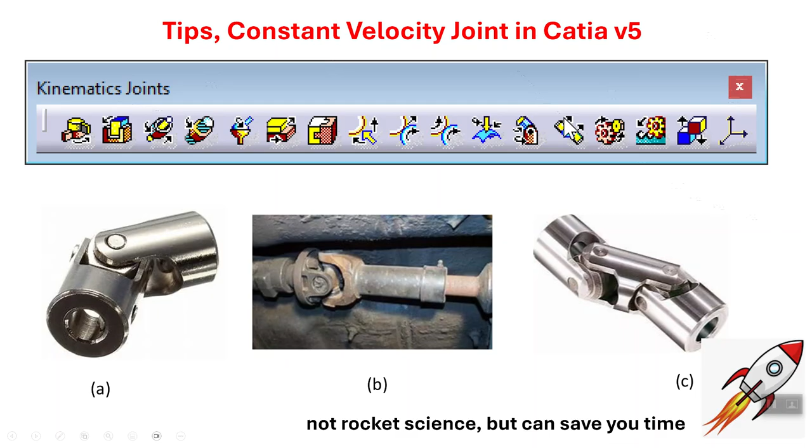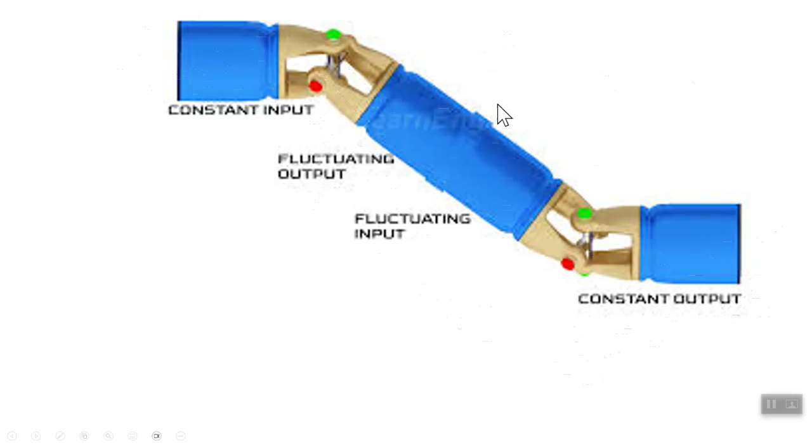In Catia, the joints are described here, and notice that there is one that kind of looks like this, and this is the constant velocity joint that we're going to be discussing. Now, here is another drawing where there is an input shaft, there's an output shaft, and notice that they're not coaxial, they don't have the same axis. But in order to transfer constant input velocity to constant output velocity, one uses this piece in the middle, which actually fluctuates. The velocity of this middle piece is not constant. Again, a setup like that is called constant velocity joint or double universal joint or double cardan joint.

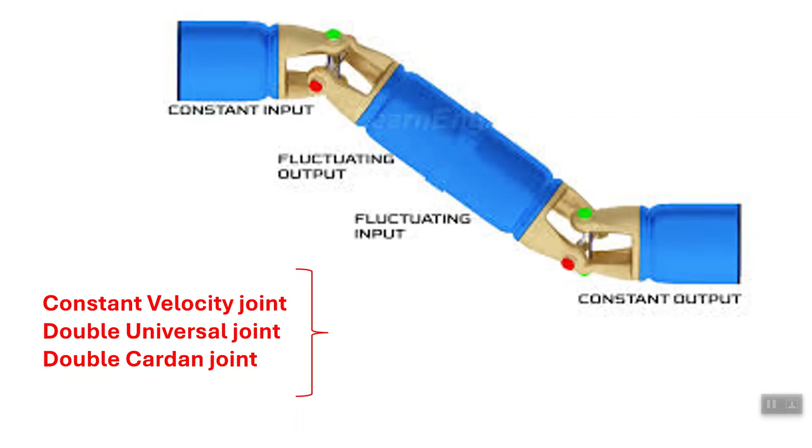Now, also keep in mind that in modern cars, constant velocity joints are used, but the setup is quite a bit more complicated than what you see here. This is the most elementary description of the CV joint. Okay. Now, what you see here is the same thing drawn in Catia. So basically, these three will make the constant velocity joint, and of course, you need two revolutes at the end where these are attached to. I have separated these so that you can see what's going on. And the purpose of these grooves here is just to make sure you can see when this thing rotates.

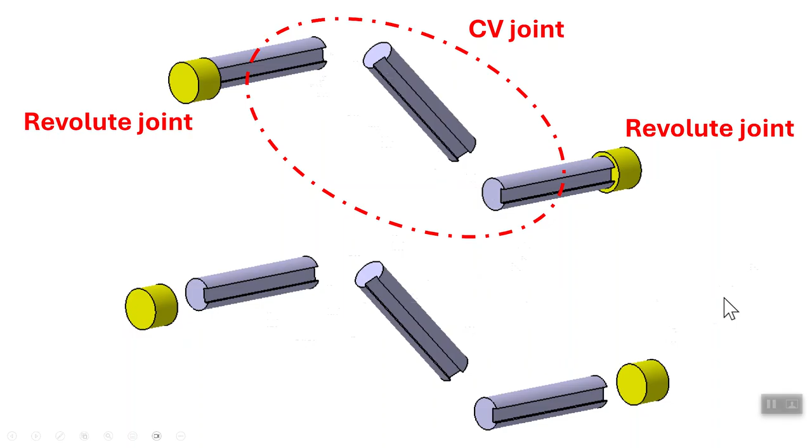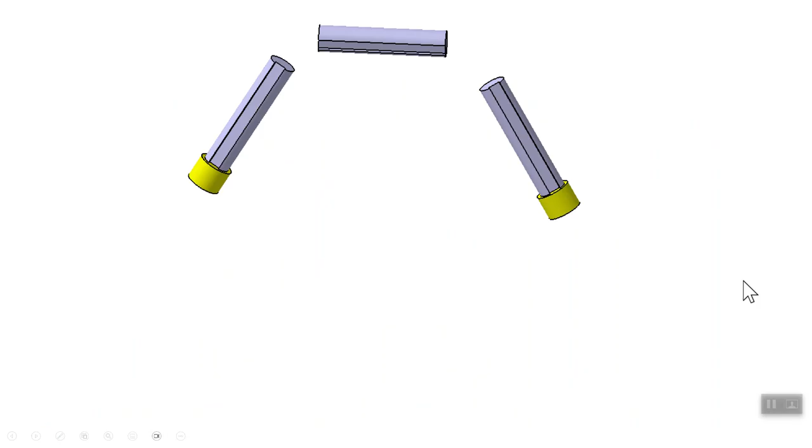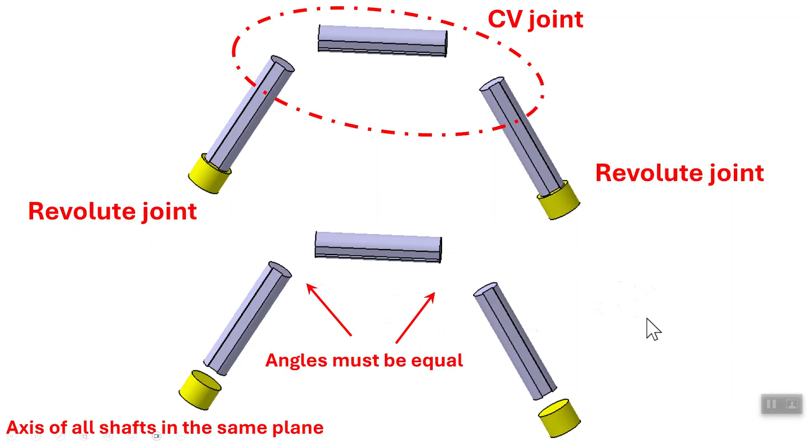But notice that under two conditions, you can create setups like this. One of them is when these two axes are parallel. And by default, that means all these three pieces, or their axes, lie in the same plane. This is one way of doing it. The alternative is this, which is called the half angle constant velocity joint, where again, these three make the CV joint, and these have to be revolute, and the axes must all be in the same plane, just like before, and these angles must be the same. Okay? So this is the other way. Now, when it comes to modeling this thing, I'm not going to do it with this setup, but we'll do it with the previous one.

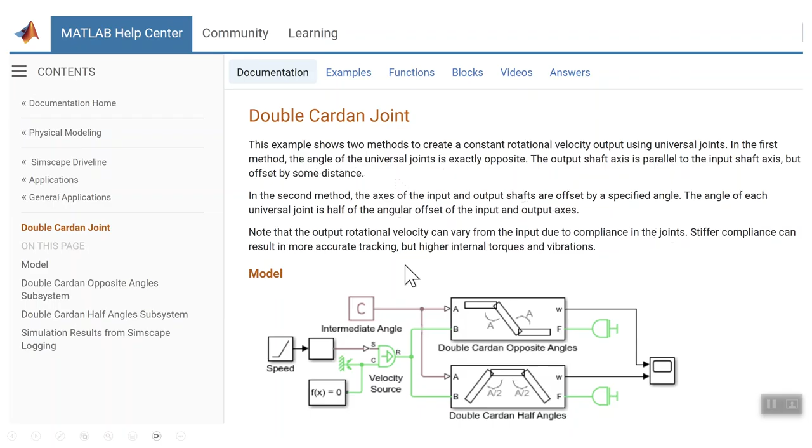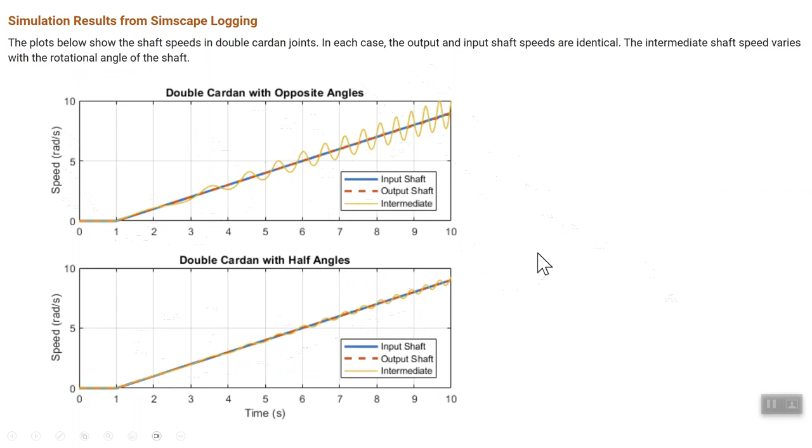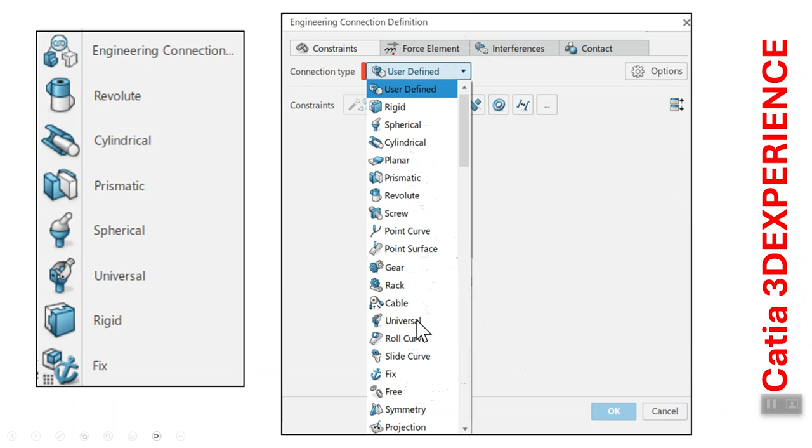There are two other good videos on the use of Catia in doing a CV joint that are given here, but once again, they don't talk about some of the delicate issues that we have to worry about. And now remember, Catia V5 is buried inside of the 3D Experience, and it's referred to as 3D Experience Catia. Now in there, if you look at the joints, the CV joint has been taken out. There's the universal joint, but the CV joint does not appear in this list.

All right, let's go ahead and do it. Dimensions don't matter in this problem, so I'm going to make one of those shafts and basically create two instances of it, and one of those yellow pieces where the revolute is going to be, and I'll make an instance of it to get the other one. So let's go ahead and insert the first new part in there, and I'm going to call this thing shaft. Properties, I'll call it shaft.

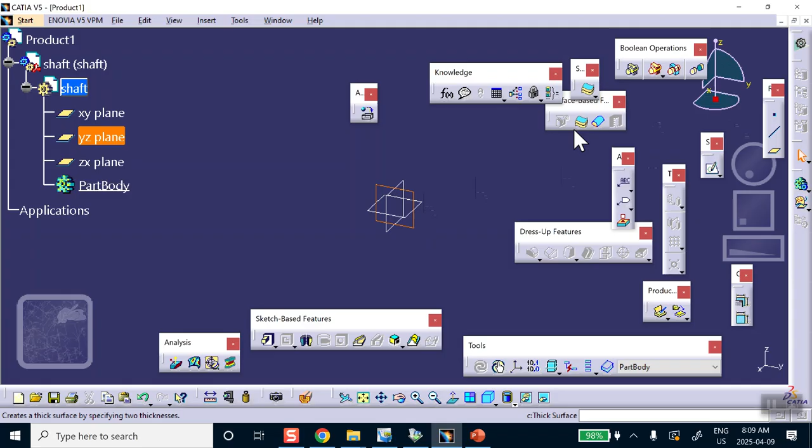Shaft. Okay, let's go make it. Dimensions don't matter. I'm going to go to this part design. On that vertical plane, I will sketch a circle like that, and I will make a slight cut out here, so that you can see actually that the thing

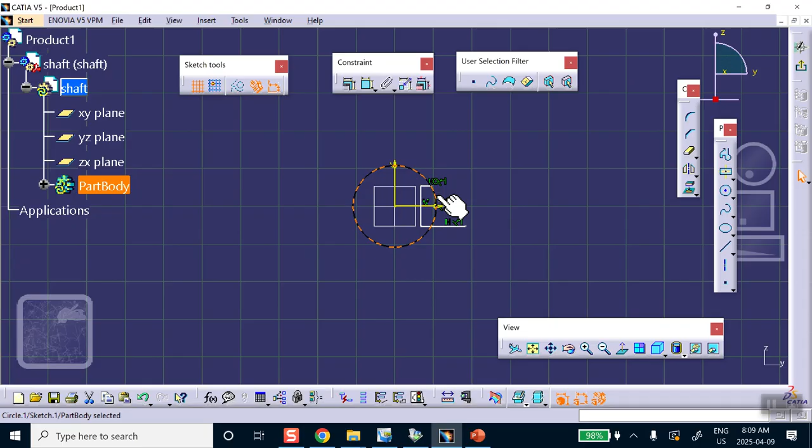is rotating. So it doesn't matter how you do it. The shape of it doesn't matter either. So yeah, I'm going to make it cut out like that. Obviously, I have to clean this up before I'm going to pad it. I'm going to get to this, quick trim that, quick trim this. Yeah, and this. And there. Exit. I'm going to pad it long enough so that I can see it.

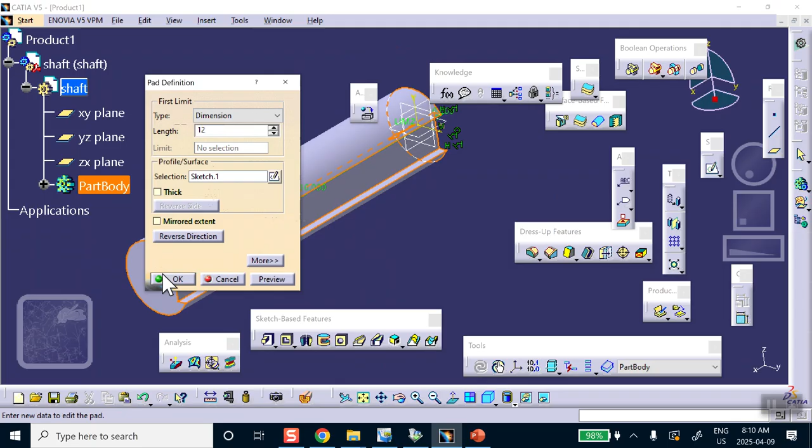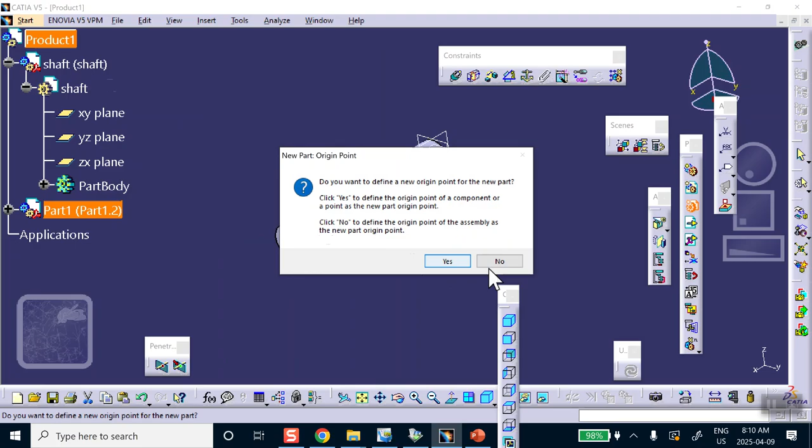Let me make this thing 10, see how it looks like. Sure. I'll make it 12. A little bit longer. These dimensions mean absolutely nothing. Okay. So this is my shaft. And then what do I make? The bearing. So insert. Let's go all the way to the top. Insert, new part. Say no, and I'm going to change the name of this thing to be bearing. That's the end pieces, where it's going to be revolute.

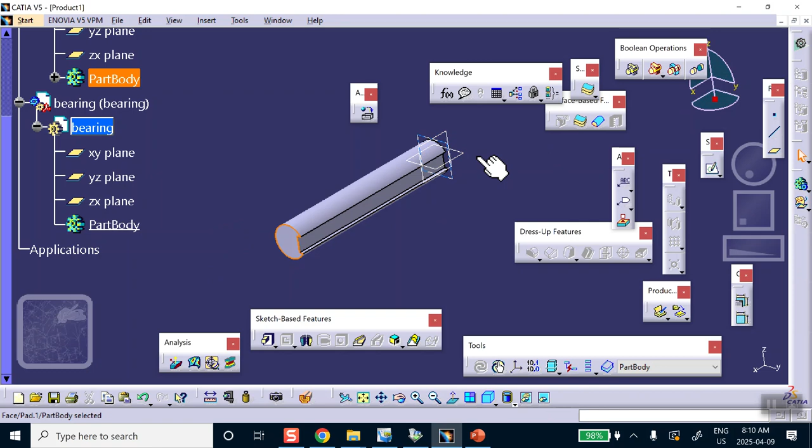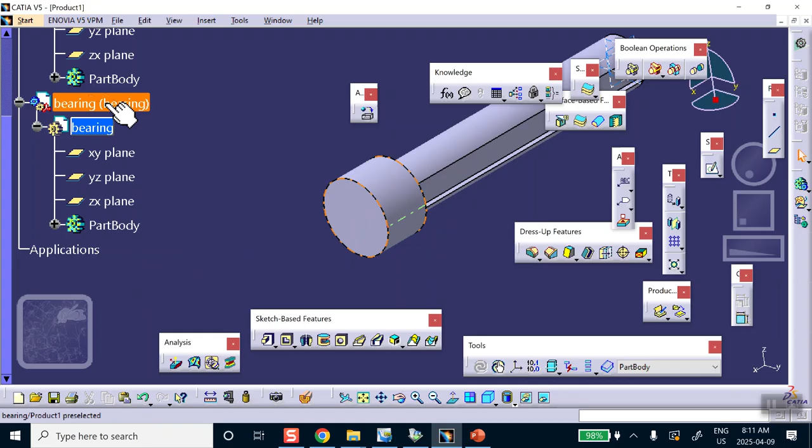All right, good. Let's go make it. Double click on that plane, on that end plane, to make my job easier. I'm going to sketch a circle and then pad. You can do it any way you want. This is going to be my bearing. Exit, and then pad it. Let me make it a little bit longer. This is going to be the bearing. I'm going to change the color of this so that it can be seen better. Yep. Very good. All the way to the top.

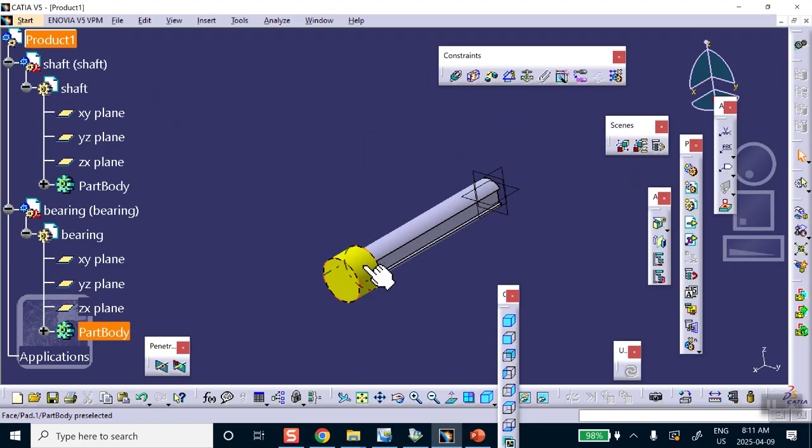Now, I need two instances of the shaft and one instance of this bearing. So how do we do that? We are in assembly design. If it's too much of a hassle, you can do a copy and paste and basically avoid that, but I'd rather use the instances right there. Here's how you make instances, okay, right there. There is fast multi-instantiation. So whatever number you had before is going to pop up.

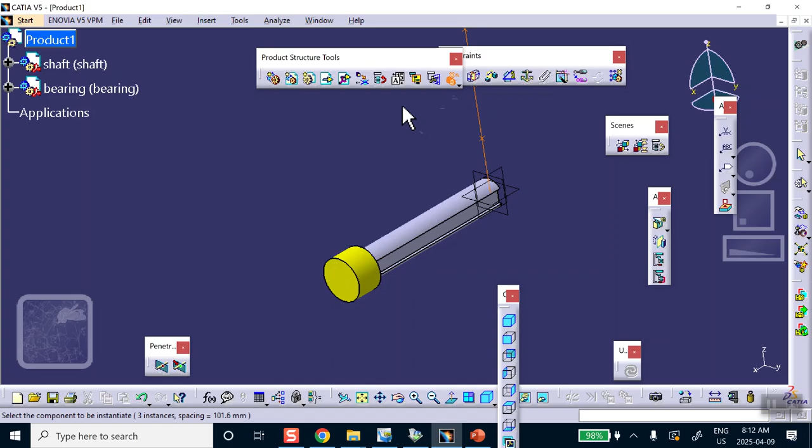Notice that it says, okay, this actually does three of them. I'm going to delete one. It doesn't matter. The reason it does three is because of fast multi-instantiation, and in my previous run, I made three pieces. That's okay. So it says, pick the thing that you want to make instances of right there. And notice that it made these, but I don't want this last one. I'm going to delete that.

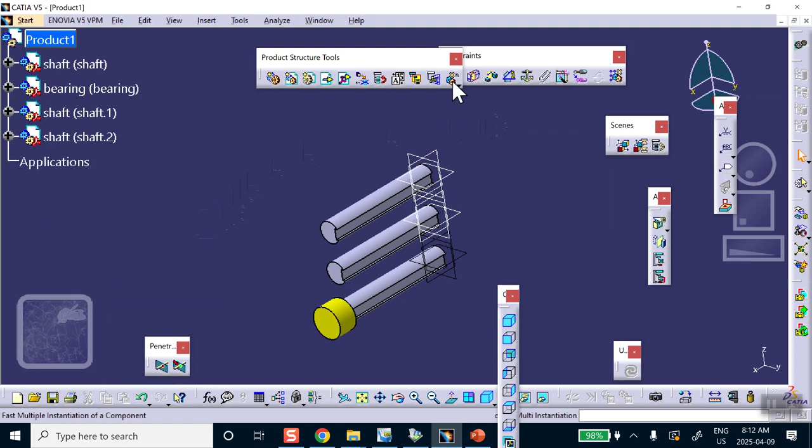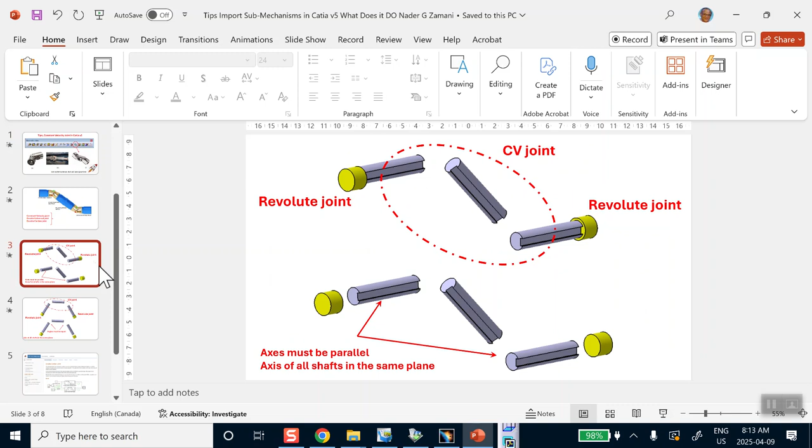And I'll do exactly the same thing, except that I select this piece and it does the three, but I don't want it. That's okay. I'll just delete these two. Good, very good. Now I have all the pieces. I want to make sure that these are all in the same plane. Remember, the caveat here is that these axes of these things must be in the same plane. And by the way, it's the same thing over here, which I'm not going to do.

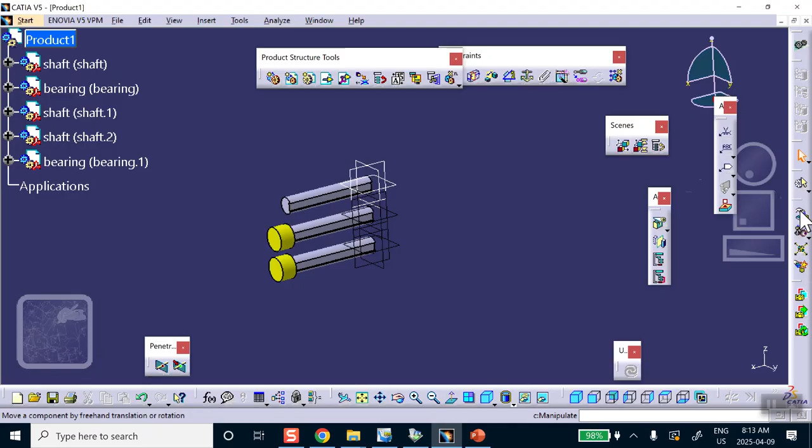Okay, so let's go back. Because this is the case, it's very easy for me to move these things. Get rid of this. Yeah, and I use here. See that? It's the manipulate, and I'm going to move things in the XZ plane. If I use this icon here, this selection, then everything will move in the XZ plane, and that's good. That's what I want. So, for example, this is moving in the XZ plane. This is moving in the XZ plane. This is moving in the XZ plane.

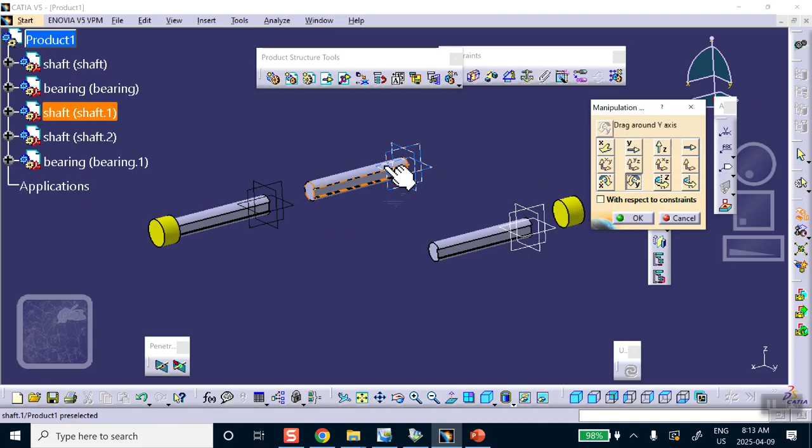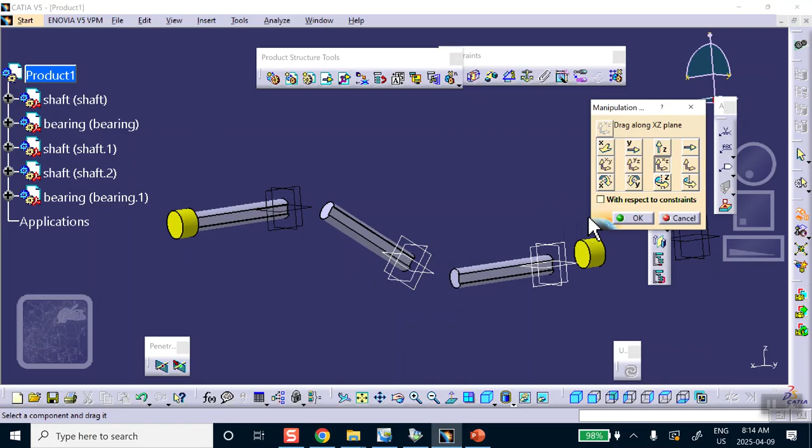However, I want to rotate it. So I'm going to rotate it about the y-axis. That's this, about the y-axis, so that it stays in the XZ plane. You can see that right there. Okay. If it's bothering you that these are drawn differently, that's okay. Now let me move this thing up a little bit. Really doesn't matter, and then we say okay. So what you see there is really this. Okay. So we're going to put assembly constraints here.

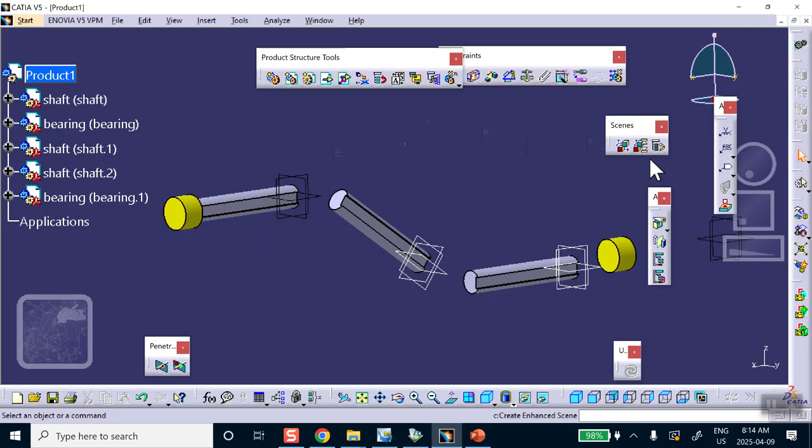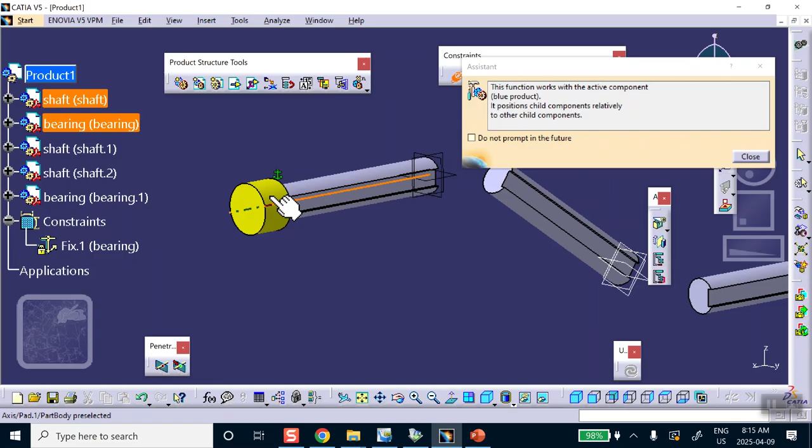First thing I'm going to do is anchor this bearing, the original bearing. So where are the constraints here? Let's get them out right there. I'm going to anchor fix this bearing. Okay, you can see that. Then, because I want a revolute joint later on, I'm going to make a coincidence between the axis of this shaft and the axis of the bearing. This axis and that axis. They're already coincident, but that's okay.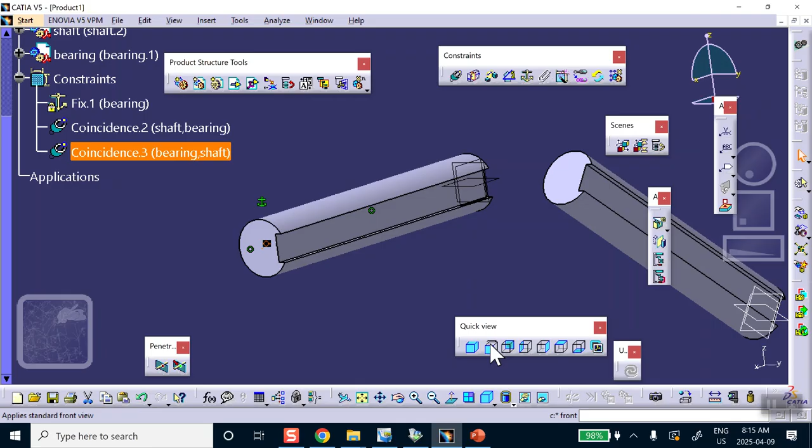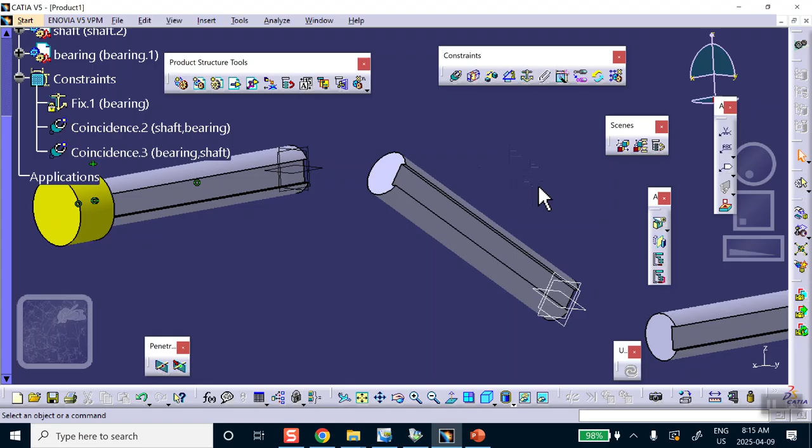And then a coincidence between the end plane, because I want to make that thing a revolute joint. This, let me hide that, and this. So this is going to turn it into a revolute joint later on. Now, let's see for a second. Let me bring this thing so I can see it. Good. Now I want to create an angle of, well, by the way, these two are parallel. These two are parallel because I moved things in the XZ plane. Remember that? So I don't really need to specify this angle. These are parallel.

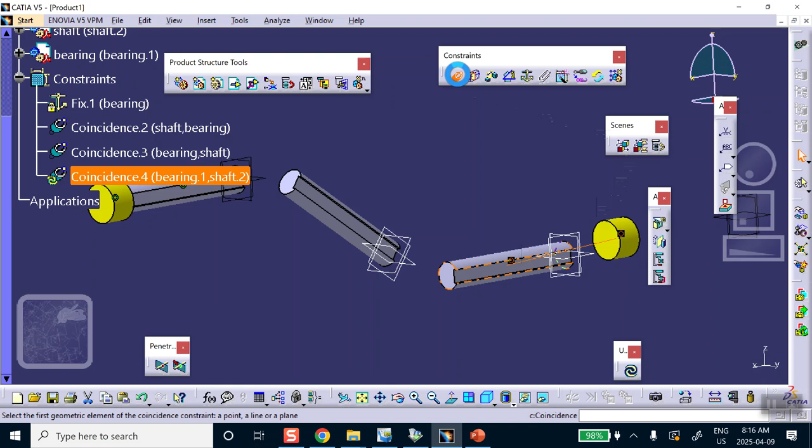So let me see now. Now I want to create a revolute there, but let me first create the revolute at this end. Coincidence between this axis and that axis, and coincidence between this plane and that plane.

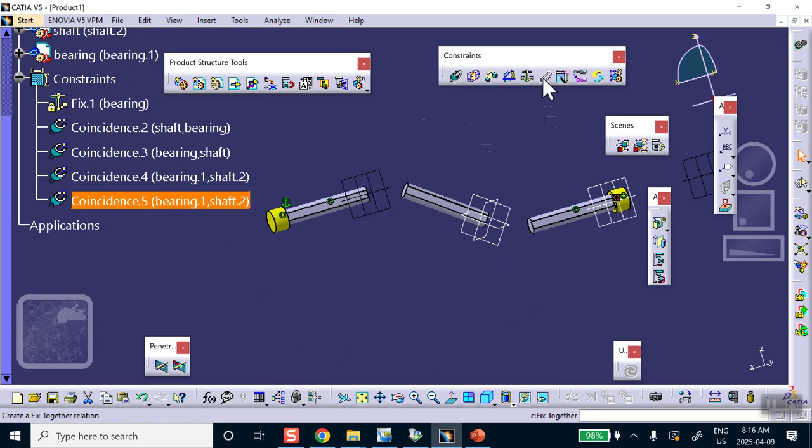Okay, and of course update. It's going to go there, and now we're going to create a rigid between these two end bearings. So rigid, to do that later, we can clip them together right there with a paper clip, fixed together. So I want to fix this with that bearing. So these two bearings are going to be fixed together later on; when we create our joints, it's going to become a rigid joint. All right. Now, we are done here.

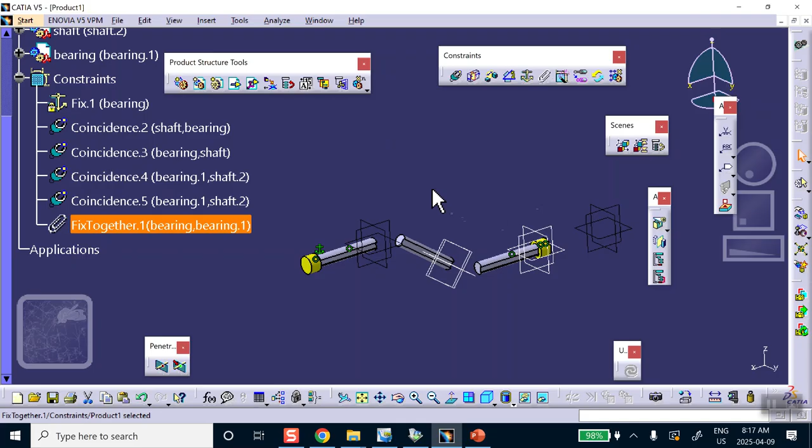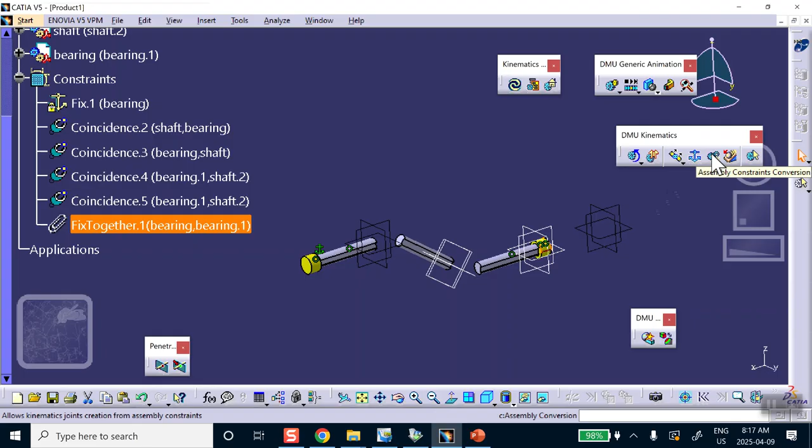We don't have to do anything with these other pieces. So let's go ahead to digital mockup, DMU kinematics, convert, get the magic wand, and convert all the constraints that I put in there into joints. There's going to be a revolute here and a revolute there, okay? And so to use this assembly constraint: new mechanism, mechanism one, auto create.

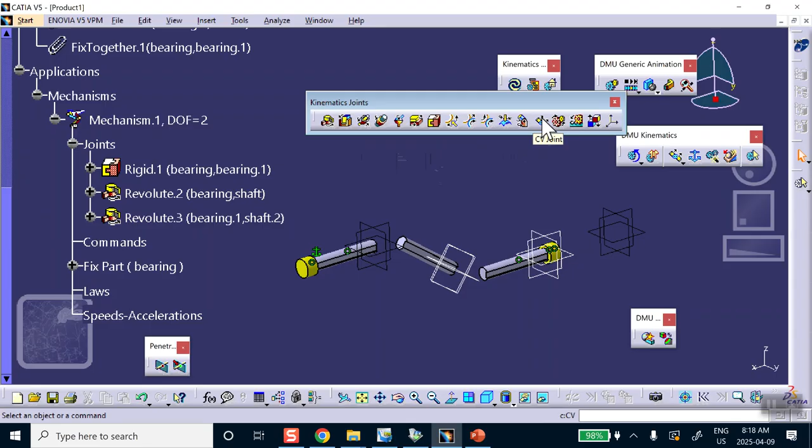So let's see what kind of joints we've got. We got the revolute at the left bearing, revolute at the right bearing, and a rigid between these two that were clipped together with that paper clip. Now we're going to go to our joints right there and use the CV joint. Notice that it's asking you for those three axes. Make sure you select the axis of the shaft, not these lines. The axis of the shaft for spin one, the axis of the other one for spin two, and the axis of the third one for spin three.

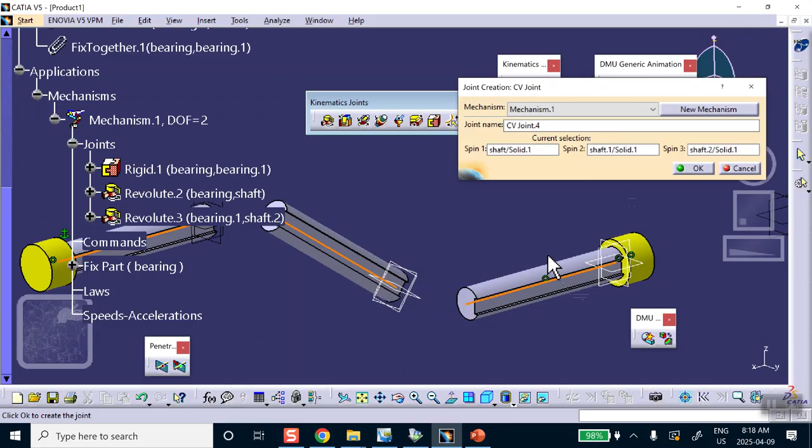In the event that these two are not parallel, or these three things are not in the same plane, you will not be able to select the third spin. In the event that these angles are not the same, you will not be able to select the third spin axis. But here, because I only did translation in the XZ plane and moved things around, these two are parallel and therefore this can be concluded. You say okay. Degree of freedom is 1.

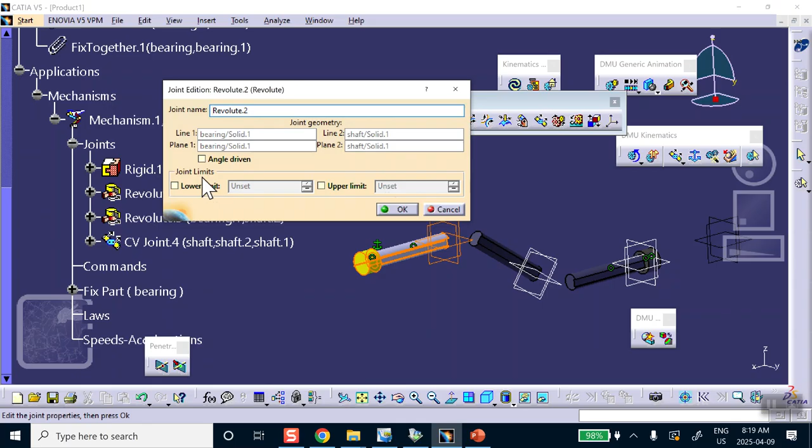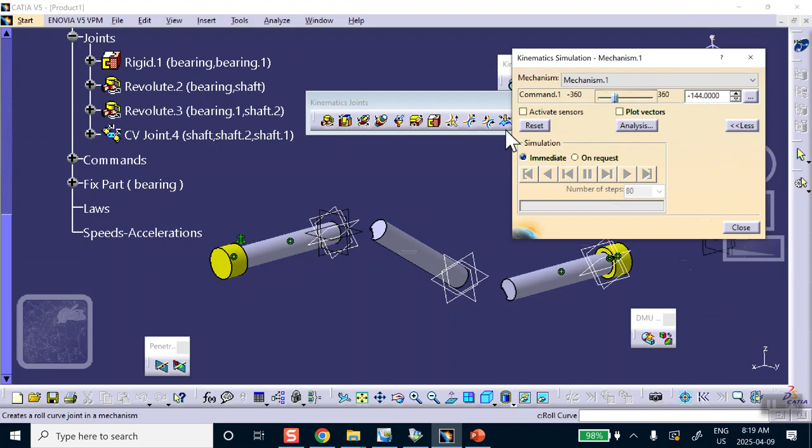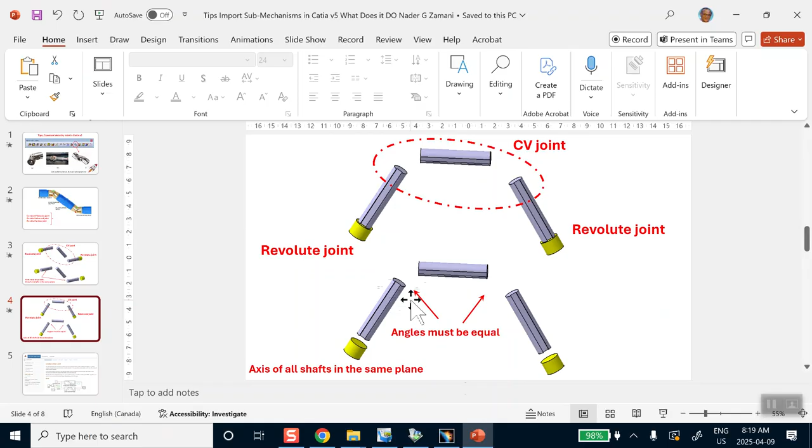So let's go to the revolute, this one, and make it angle driven. Obviously, the mechanism can be simulated, and you can just manually move it. Now, if you want to put some physics into it and check the velocities, that's easy. So I'm going to reset that. We have shown how the CV joint can be created. If these two are not parallel, it's not going to work. And although I've not done it, if these angles are not the same and these are not in the same plane, it's not going to work.

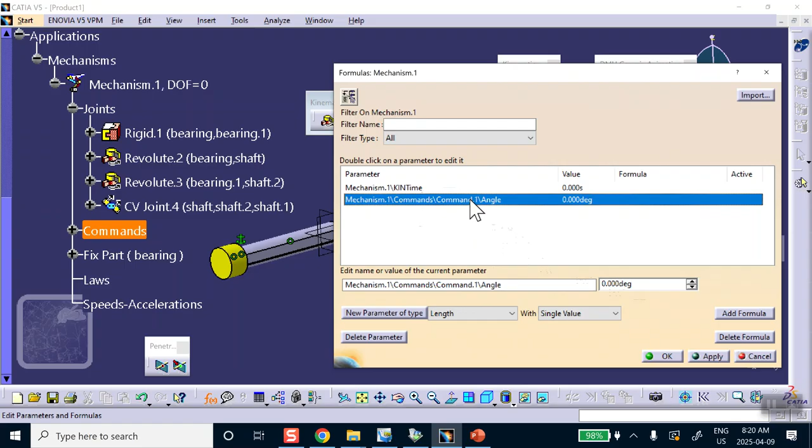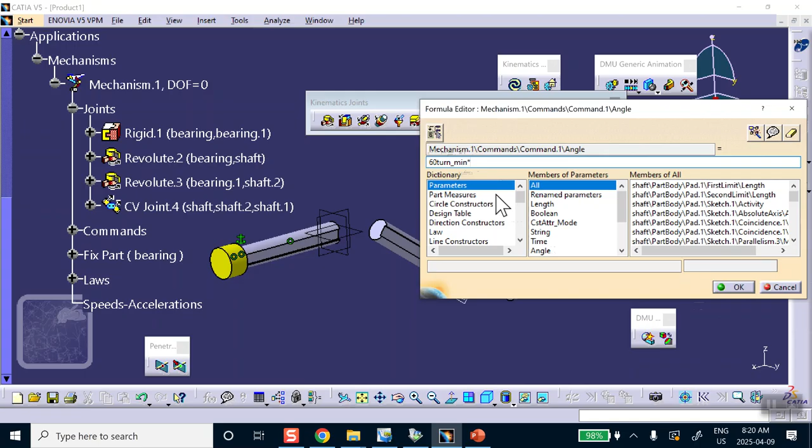Okay, now let's put some physics in it. So here's f of x. Click on the joints. There is this angle-driven joint. Let me give this thing a speed. I select that, add a formula equal to, how about 60 RPM? 60 turn_minute, or you can write, for example, 360 degrees_second, multiply by time, and then you say okay.

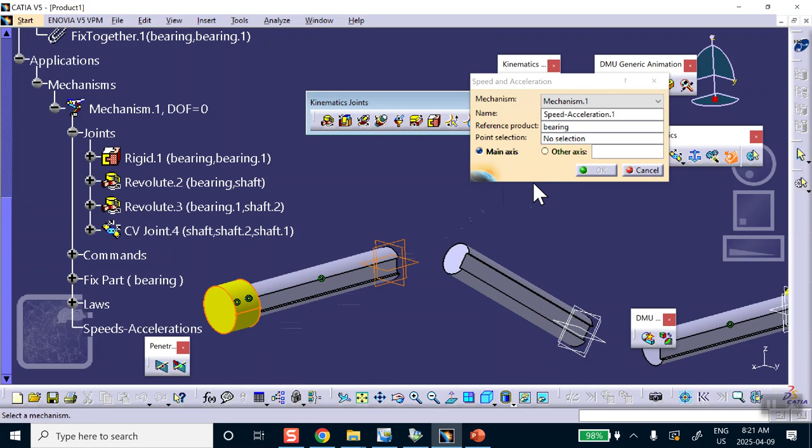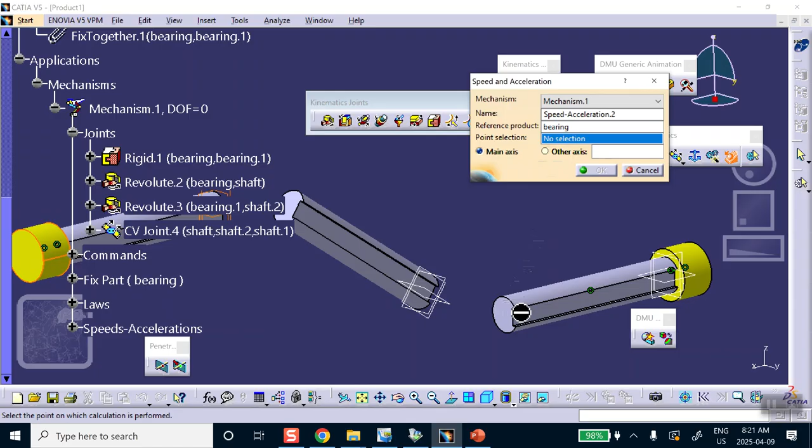Because later on I want to plot some stuff, let me create some sensors. For the reference product, I select the left bearing that's fixed. For the point, I'm going to select this point. Let's do another sensor for this end. Reference product is again the fixed bearing, and for the point, I select this point. Say okay. Very good. Now we're going to do simulation with laws.

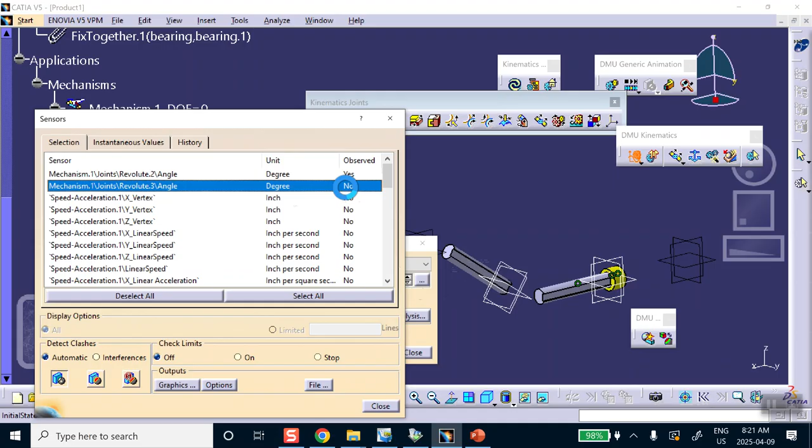Let's do 2 seconds, so this is going to turn twice, maybe 5 seconds, doesn't matter. Activate sensor. I want to see the angle of the two revolute joints, this one and that one. Move this out of the way and play it. 5 seconds. Let's look at the plot of the angle of the two shafts. They coincide. So what you're seeing is these graphs, with the middle fluctuating bar not plotted.

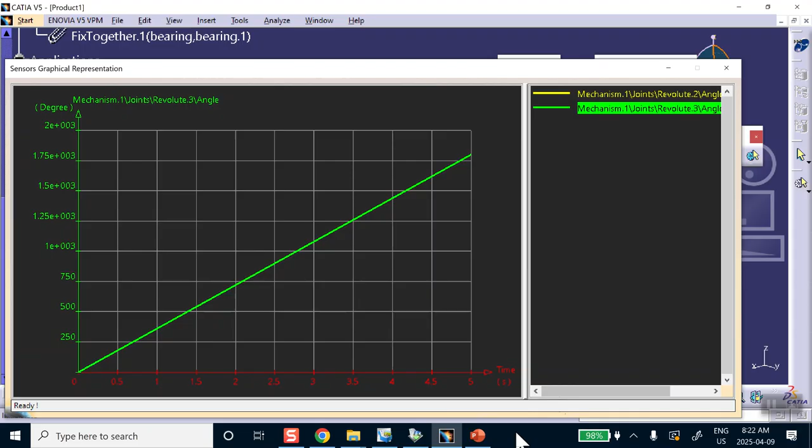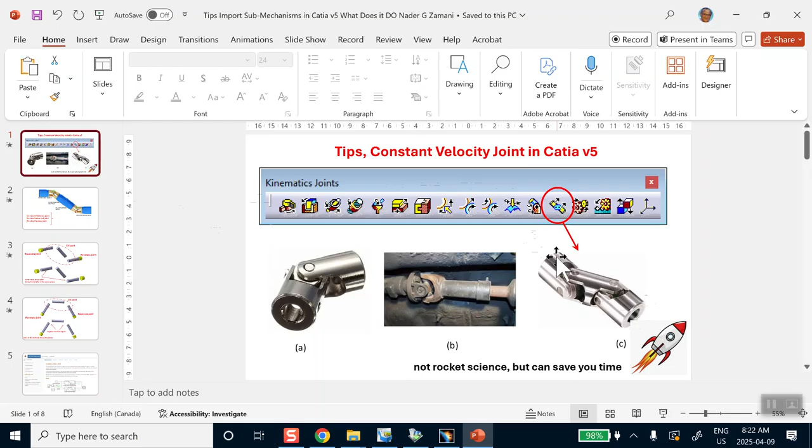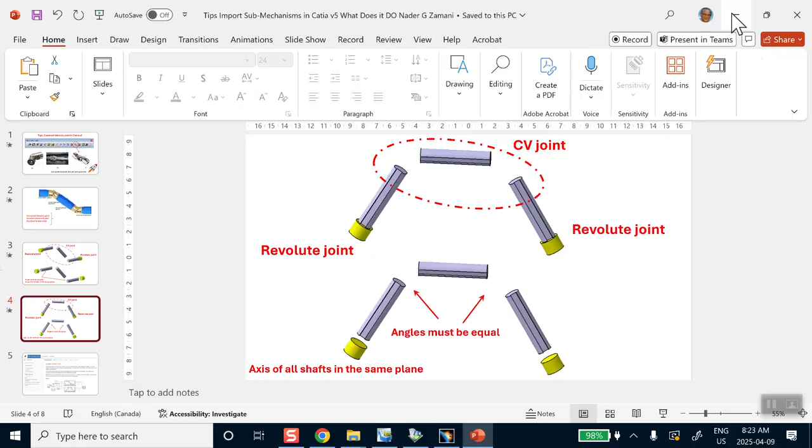Okay, folks? So the moral of the story is that, although this is such a trivial thing that should be described somewhere, the constant velocity joint can be used, but the restriction is that these two axes must be parallel. And in this setup, these two angles must be the same. If you change those angles or make them slightly off, not parallel, you won't be able to use the CV joint. Hopefully that was useful.